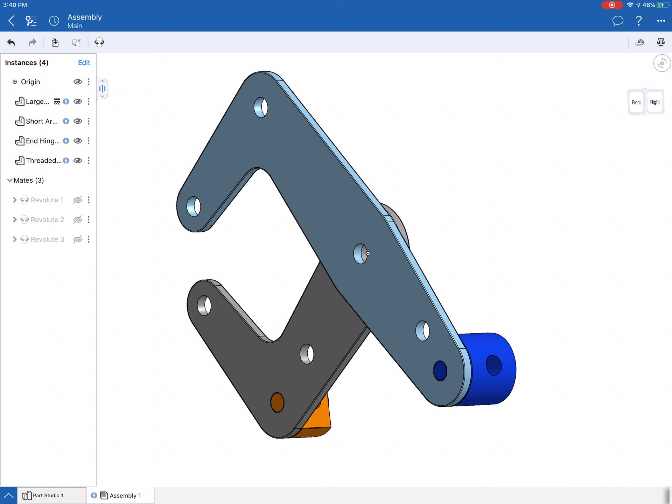We're going to start with the long pins, and we're going to notice that when we access our large arm, our cantilever, we only have one long pin, not four. We need four of them according to the notes, which is fine, because what's going to happen is we're just going to do the process multiple times to be able to have the four different pins.

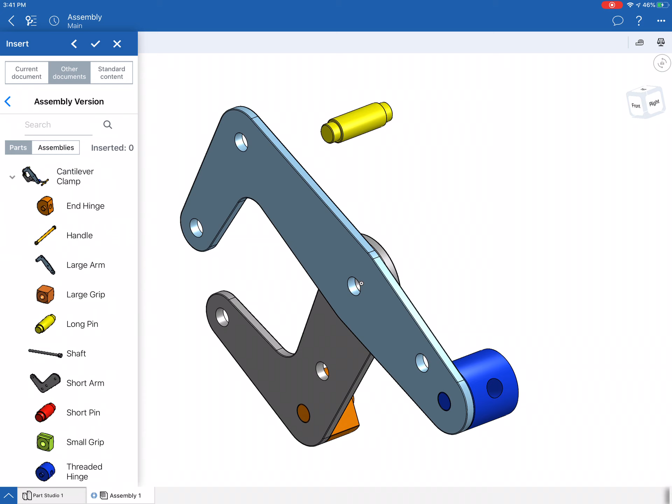So I'm gonna go through here, and again I'm doing this four different times, long pin, and I'm gonna click it, and I'm just gonna move them so that I don't confuse them with each other.

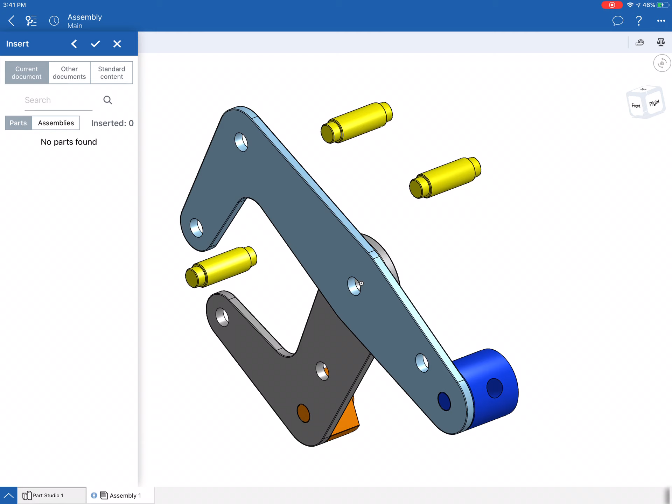That there, and one more. And I'm gonna do created by me, Cantilever Clamp, long pin, and again, just move it down. That's supposed to go in here, in that space. Click OK.

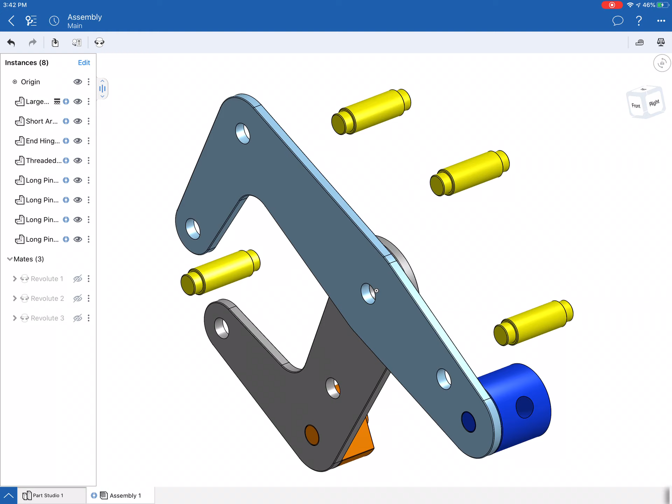Alright, so first things first, I've already done step 12, which is to insert all four pins into my assembly studio. Now, in this case, as they are specifying here, is that my pins do not turn; they're fixed in place. The arms turn around them, or they just need them to hold things in a specific position.

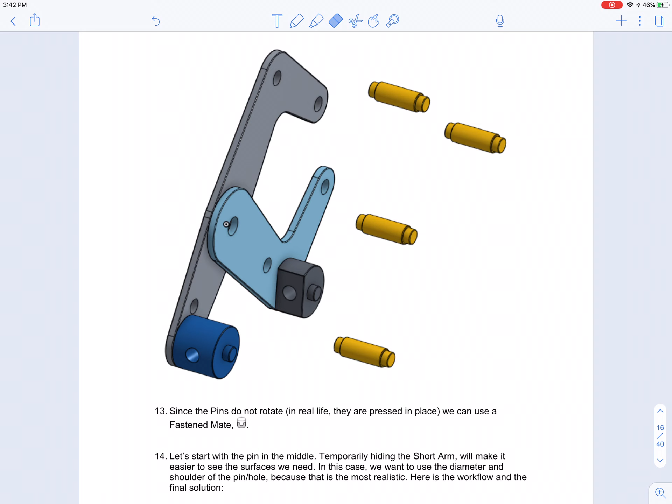So in this case, we are going to use the fastened mate. That's what we are using for this. And again, we need to make sure that we're pairing the right edges with the corresponding edges that we need to pair up. And we need to be careful when we do that.

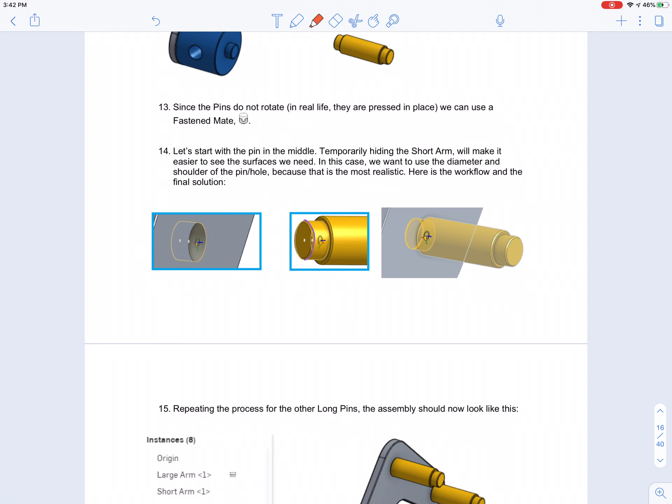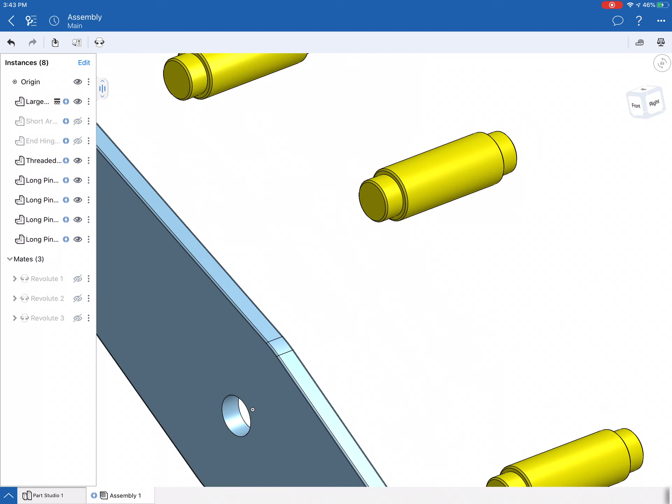So I'm going to go to my drawing. And to do this part, what I'm going to do is hide my short arm so that it doesn't cause confusion. And I'm going to hide my end hinge. And I'm going to connect this pin right here with that opening right there.

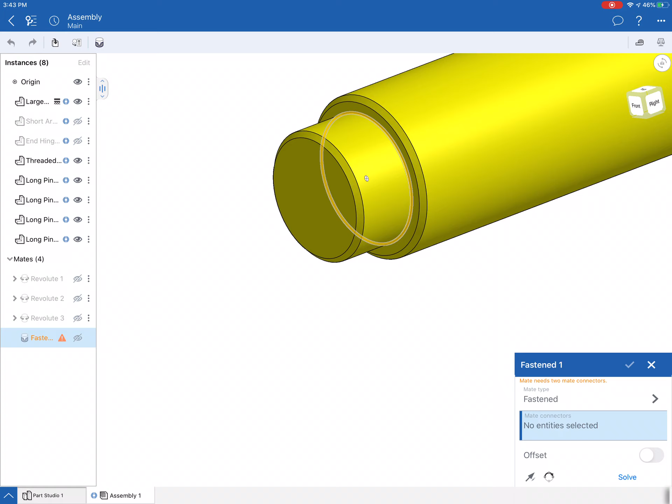So I'm going to click on here, and then I'm going to click Fastened Mate. We were using Revolute Mate before, now we're going to use Fastened Mate. So there we go. Alright, again, I need to make sure I have the right part selected. So I'm going to click this ring right here.

I forgot to do something. I forgot to click the crosshairs. You got to click the crosshairs, okay? And then I'm going to click this, and again, crosshairs, boom, now they're mated.

I'm going to do the same thing with this one over here. Again, I'm going to click OK. Then I'm going to click Fastened Mate. This is from before, so it's already there.

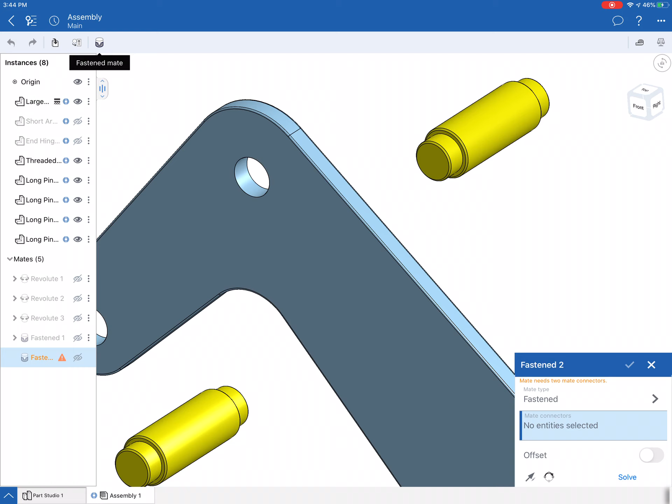I am going to click on that edge right there, and I'm going to click here. Oh, I forgot, I need to click the crosshairs. Do not forget to click the crosshairs. If you don't click the crosshairs, they won't mate. Click there, boom, fastened. And I have to do the same exact thing two more times.

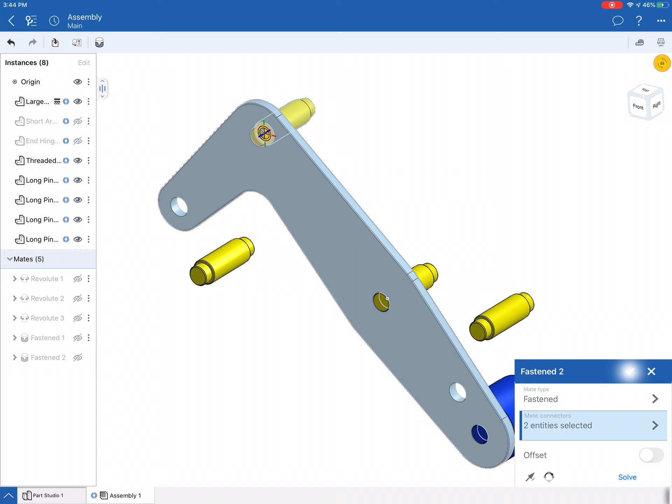Again, to double check that you've mated them correctly, all you gotta do is zoom in and make sure that they're flush with the surface. If they're not done the right way, they will be sticking out, or they will be slightly inward. So just do that again for the remaining two pins, and I'll walk you through the short pins.